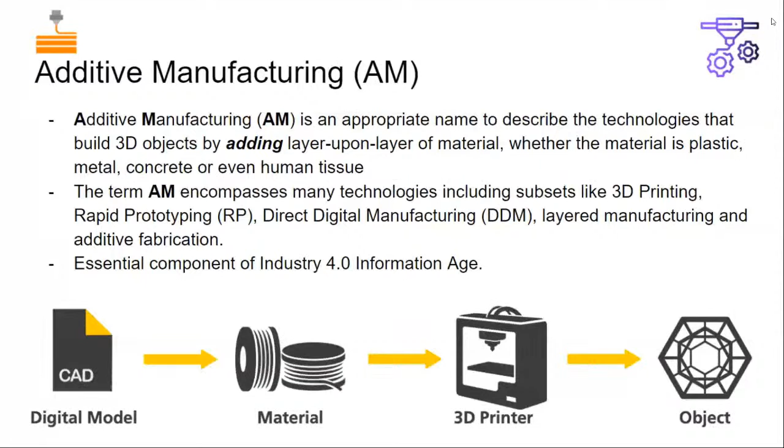Now prototype means the first product that is actually made for testing purposes, for modeling, testing, or showcasing. Now, if we create prototypes using the traditional method, it is highly costly and will take up a lot of time. So what we do is, most prototypes nowadays are made through additive manufacturing. That is why the term here is rapid prototyping.

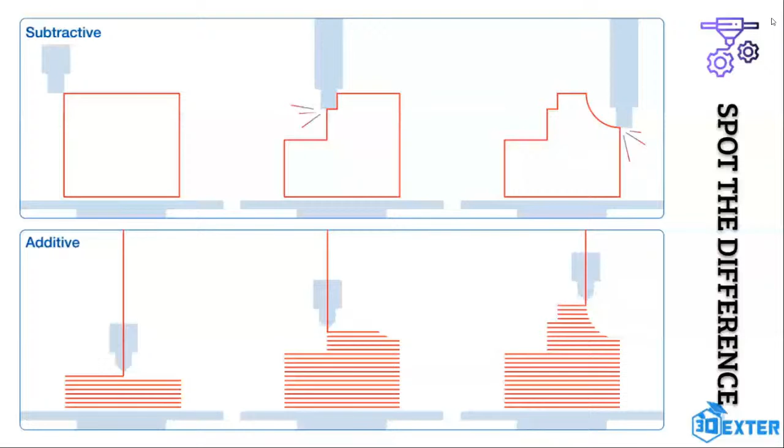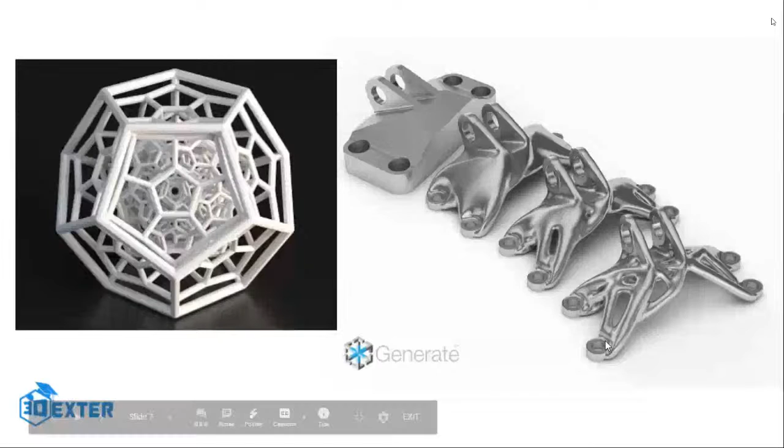Another huge advantage of 3D printing is, to the right, this process. You see, from the top you have an object, and you have reduced the mass of the object to such an extent that material is only available in the places where there is a high amount of stress. This complete process is known as topology optimization. Now the final object, as you see, the design has become a lot more complex, and it cannot be created using traditional methods.

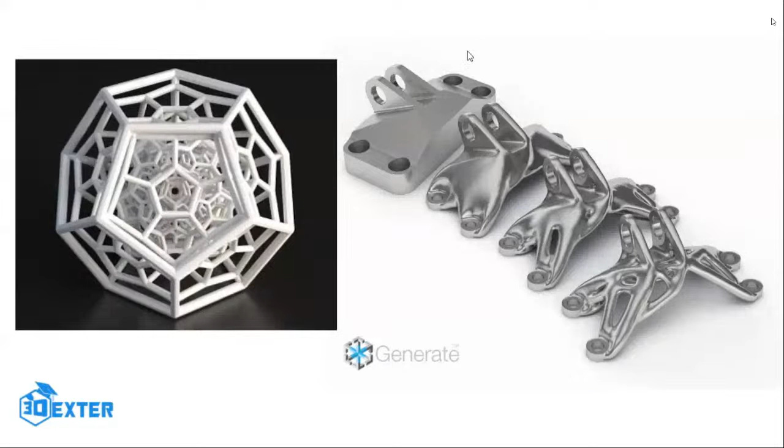For getting this kind of structures, very advanced, the term that is mostly used is biomimicry, resemblance to the human body or the structures in the human body. We can actually do that using 3D printing for such kind of structures.

Now let's move to the application areas in which sectors the 3D printing is being utilized. The first important thing is research and development. All research and development fields, in our country as well as foreign sectors, have utilized it to create as many prototypes as possible because it is highly cheap and the quality is better.

As I have just shown you, there was material reduction through topology optimization. So aerospace, automobile, those industries are trying to reduce the weight of their product. They have utilized it in the final product as well, not only to create prototypes but also to create the final product.

Now one of the sectors is biomedical, this is a sector in which the highest number of patents have been registered in 3D printing. There is a term called customization, and it has impacted so greatly that the medical industry has actually accepted the usage of 3D printing to a greater extent. Let's look at that.

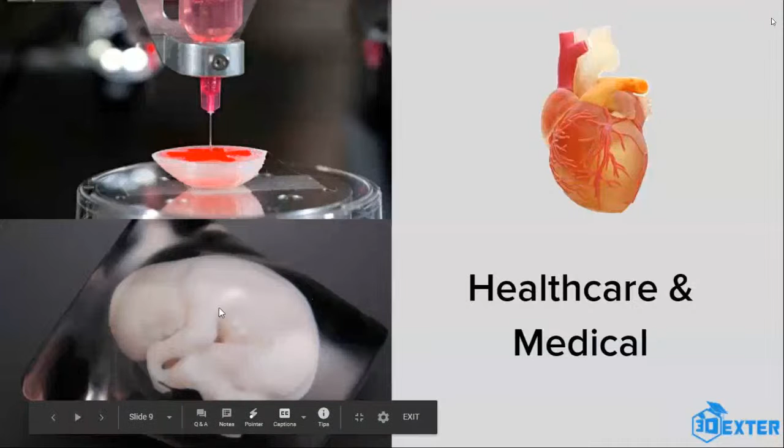In the same way, just below it, you can see a human fetus. In Japan, babies that are born still have defects during birth. So doctors try to 3D print the fetus so that they will be better ready with proper tools while operating on the child, so that there will be less blood loss and the child can easily survive.

Now, as I told you about mass customization, customization means every person's need is completely different. The shape and size required for each person is completely different.

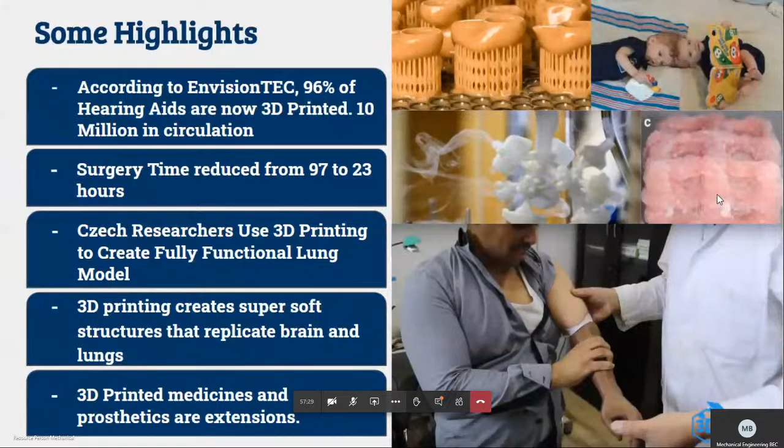Now the most important thing is prosthetics. Suppose a small child has met with an accident and lost his arm. Throughout the age he grows up, he will require a different set of prosthetic arms throughout his life. As long as he is growing, he has to change the prosthetic arm, and that can be done through 3D printing.

The biggest advantage here is cost effectiveness. The normal prosthetics actually available in the market are costly. 3D printing can create highly accurate prosthetics that are highly cheap as compared to the traditional method.

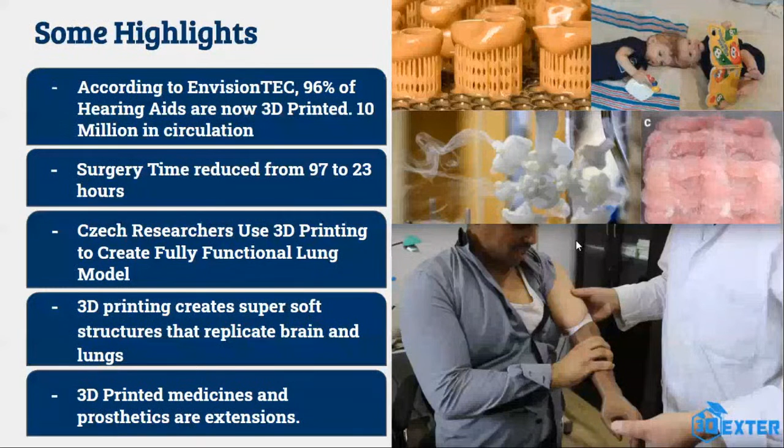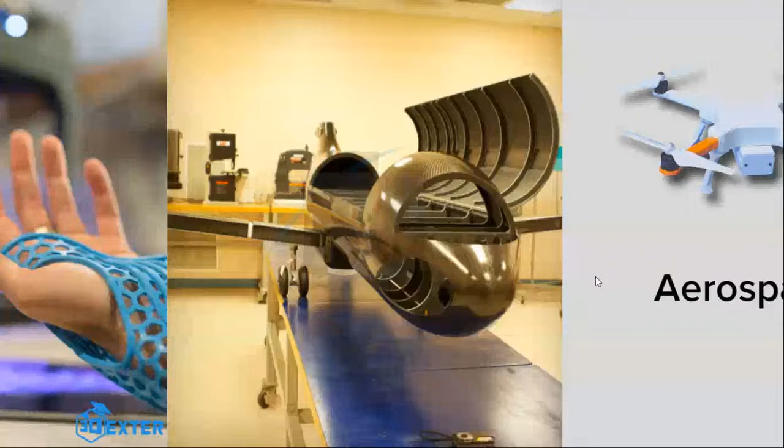Next is aerospace. A lot of advancements have been done in aerospace, creating plane structures and researching ways to reduce the weight of the plane to improve its performance.

Airbus now has a record number of 3D printed parts on the new A350 XWB aircraft, around 1000 parts. This isn't just a prototype, they're using 3D printed parts in their final product. NASA's rover currently contains over 70 FDM 3D printed parts. The advantage is that very complex designs can be created through 3D printing, which traditional manufacturing methods do not allow.

Now let me show you an example. This is a case study which shows a complete comparison between traditional manufacturing and a 3D printed rocket.

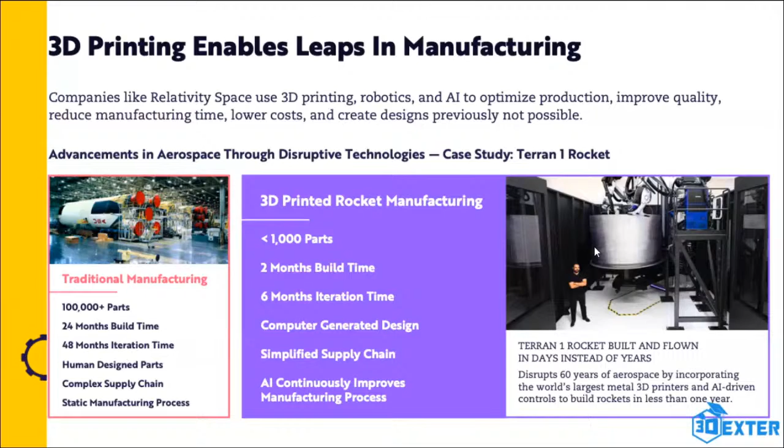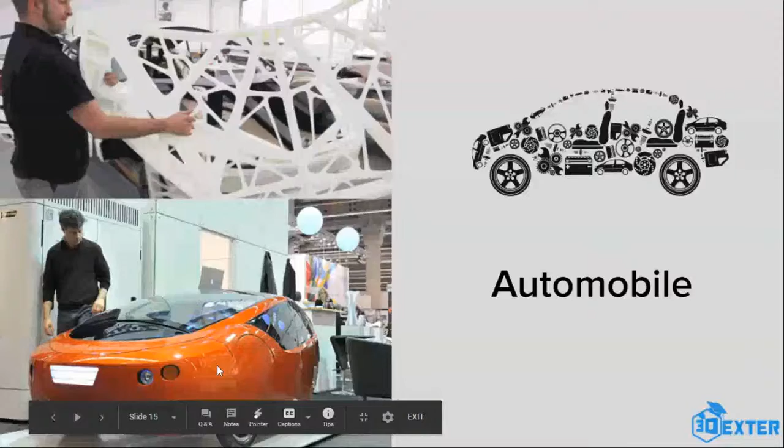A lot of parts of cars are being 3D printed nowadays to improve efficiency. For performance cars like Ferrari, they are trying to 3D print parts to reduce friction in the internal parts and reduce the weight of the car.

Next, going to education and research. The best thing about this is we can create prototypes very fast.

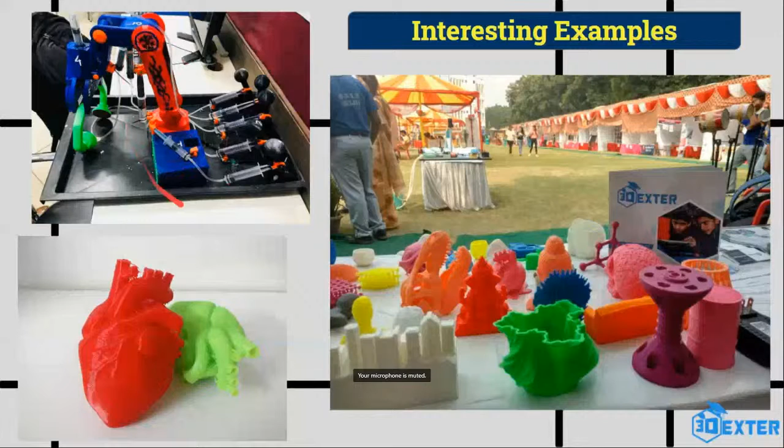3D printing is playing a huge role in education as well as the research industry, as you can create prototypes in a very fast manner. Now a huge advantage is mass customization, as the demand for individual needs is increasing.

Suppose you want a car designed exactly the way you want it, that is known as customization. The demand for customization is increasing, and that demand only favors 3D printing. It is completely different from mass production.

In mass production, we have a single design of a car and we create thousands of cars of the same design. Now we can create a thousand cars of different designs according to each customer's need. That is known as mass customization.

Moving into customizable products, the drone industry is rapidly evolving at present. They want lighter, faster and stronger materials. As the study of materials increases rapidly, designs are also changing rapidly, and these design changes can only be implemented through 3D printing.

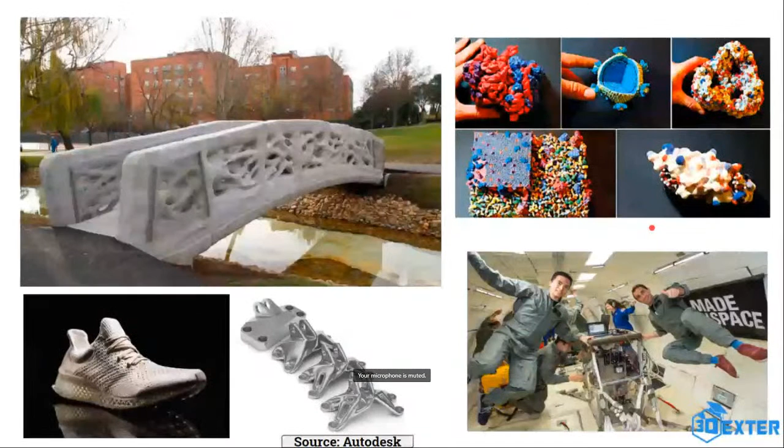In the architectural sector, scientists have used concrete to 3D print not only houses but also bridges. This is a bridge in Spain that has been completely 3D printed.

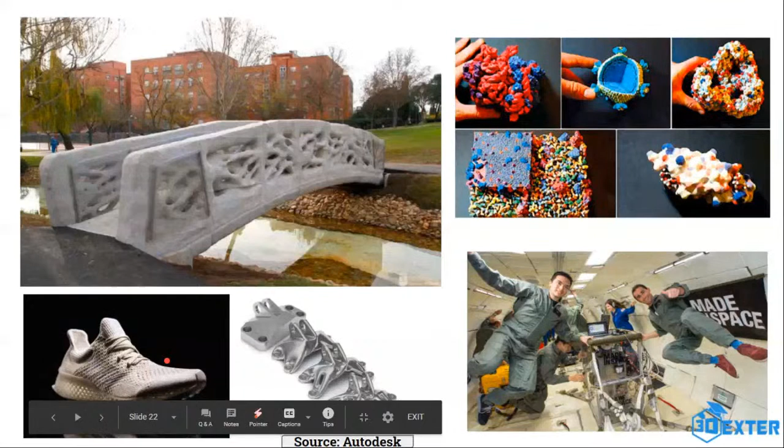Nike and Reebok have also started utilizing 3D printing to create customizable shoes. The word is customization, mass customization.

Now we have seen all the applications of 3D printing. Let me show you how it is actually done. Let me stop sharing this screen and share the screen of my software instead.

You can use any software for designing, it may be CATIA, SolidWorks, or any other software. First, you have to utilize the tools available to you. For example, in SolidWorks there is a wide variety of objects and tools that can be used for creating very complex designs. We are using SketchUp because for basic beginners it is very simple, and anyone can learn the basics of designing from this software.

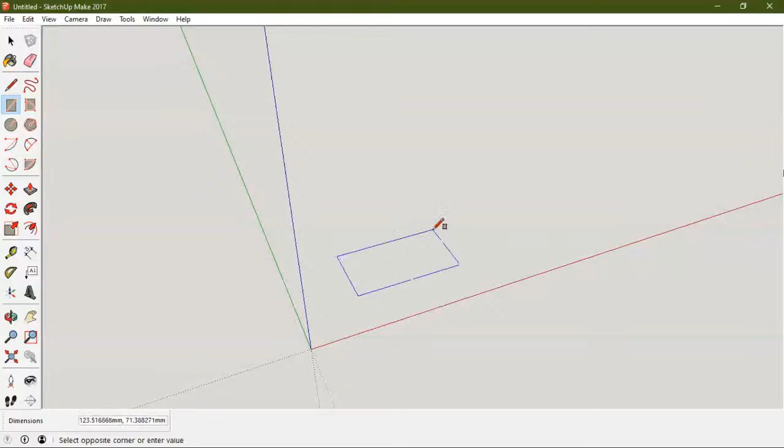We have tools that create 2D objects which we can then convert into 3D. Let me take the example of a rectangle. Now see what I will try to do, I have a pen tool and I will try to create something over here.

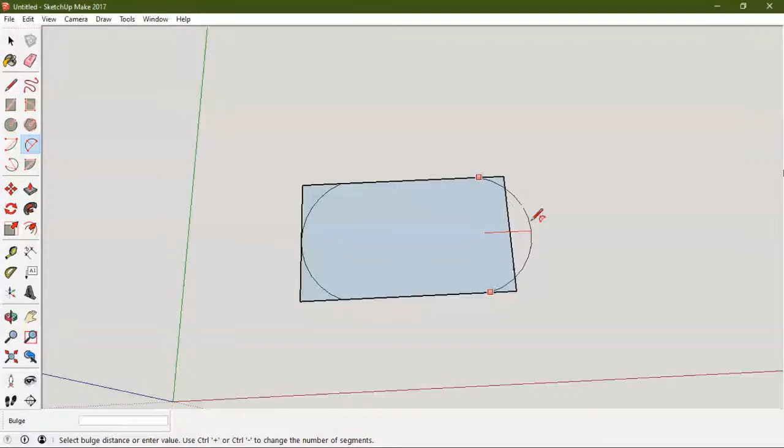Let me try to create a keychain over here. Not an issue, I will remove the excess part. Right now I am creating only the 2D image, and now I am using this push-pull tool.

These are all the 3D tools, so I can convert this 2D shape. Right now it is simply a single layer, like a simple paper. What I will do is push-pull it to make it three dimensional.

Alright, let me bring it to the center of the screen. Now, we have used the push-pull tool to increase or decrease the third dimension, that is the height. Alright, I have given something.

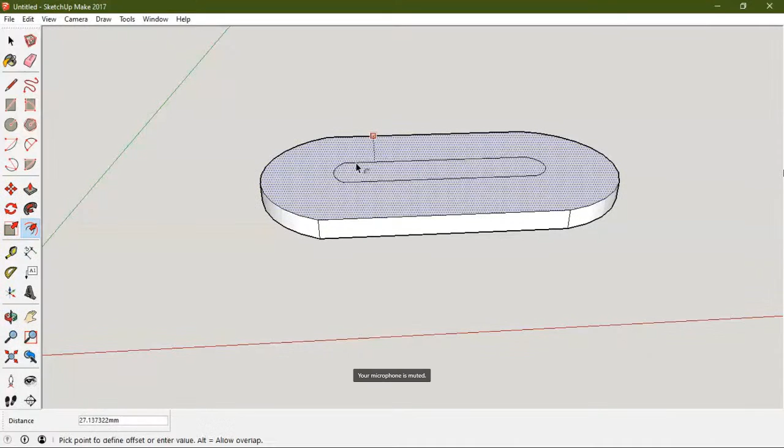Let me use another tool. This is an offset tool. Let me create another boundary inside. What I can actually do is take it down and write something over here. Okay, not my name, I will write the college name. So what we can actually do is design anything according to your requirement, right?

So you can use any software, as I told you. So this is the college name. Let's bring it to the center and reduce the size to make it appropriate. So I have done designing.

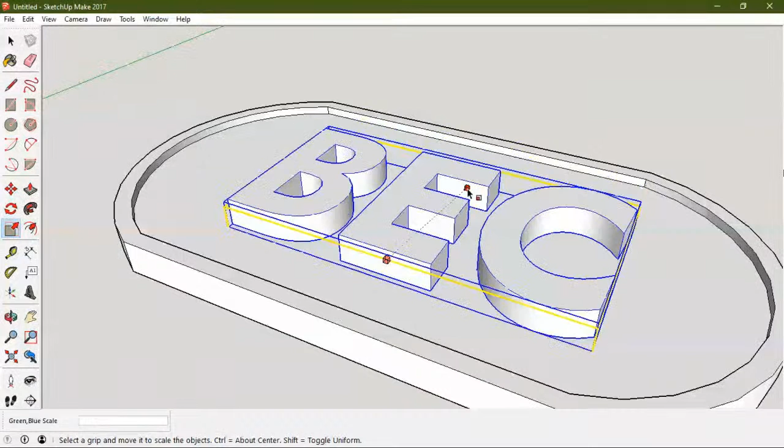Now, once my designing is completed, I will save this file. Remember, in 3D printing, whenever you save a file in Microsoft Word, you save it in doc or Word format. Now, while saving in any software like SolidWorks, they have a different format, and SketchUp has a different format. For 3D printing, whenever you save your file, you have to save it in .stl format.

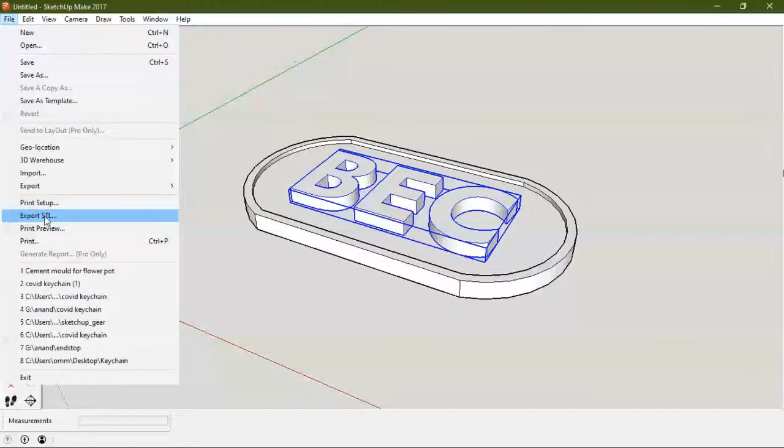I will go to File, then Export STL, and click on that. Once it is done, it will ask me where to save it. I will export it and save it somewhere, wherever is required. Let me save it in the desktop, BEC. Alright, so I have saved this in the desktop.

Now I will be opening another screen. So now my complete screen is visible. Now I will open the file. In the desktop you see this icon, it is in STL format. I will simply double click it because I have a software known as Cura installed on my computer. It's very interesting because all the settings required for 3D printing are done through this software, that is Cura.

The spelling is C-U-R-A, Cura. We have to wait a few seconds. This is the software, Ultimaker Cura. If you want to download it also, it is a very free software. The SketchUp software is also free.

You can use Google to search for SketchUp and Cura. Now, the advantage of SketchUp is, as I told you, it is very simple and anyone can learn it. The next is Cura, and in Cura the huge advantage is, with 3D printers being a bit different according to the hardware, Cura gives you the advantage that you can add your own machine.

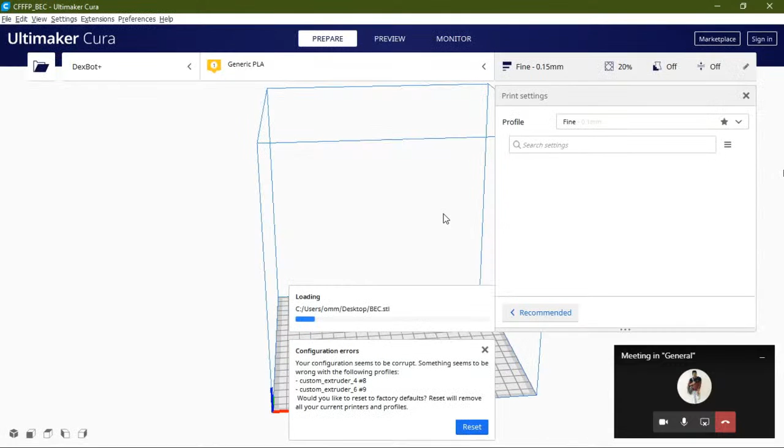Now if you go to Google and type Ultimaker Cura, Ultimaker is a 3D printing company and they have made an open source software. This is a free software, as I told you, you need not buy it. There are other softwares available which are paid versions, like for example Flashforge, a company.

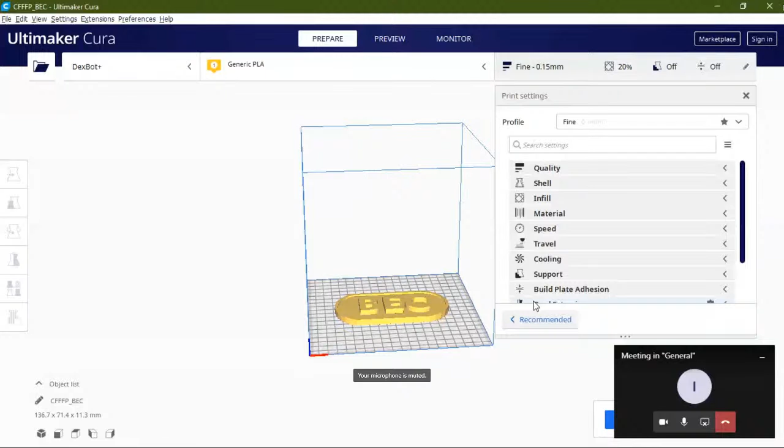Alright, now the software Cura is open. In the screen you are able to see a box over here, right? Now, as I told you, I can add my machine. You see, there are a lot of different varieties of machines.

Now the machine will be printer. I will go to manage printer. Whichever machine I want, I can select that. I can either add the machine or remove the machine. Suppose let's go to machine settings.

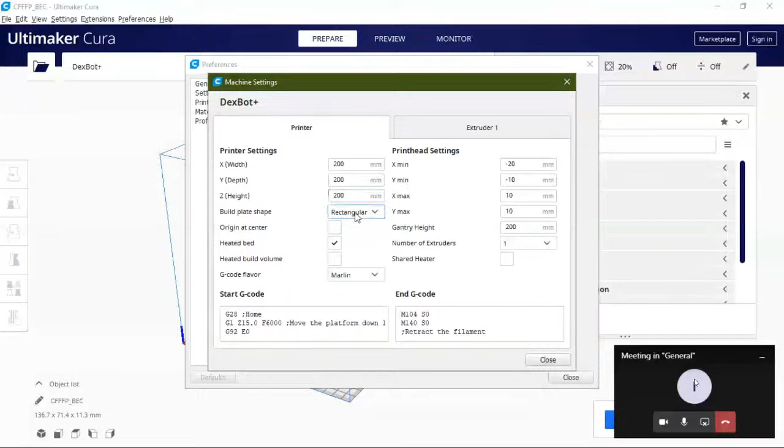All the hardware requirements of the machine are done here, like the x-axis, y-axis and z-axis. So basically the hardware data of the printer, we are entering it over here, the bed plate, all the size of the bed plate, whether it has a heated bed plate. So all the options we are providing here.

Also the nozzle, there is a nozzle, I will show you that also. So basically now the data like the filament size, the nozzle size. Nozzle means the part from where the material comes out. All these are available. I will select according to my needs. If I am attaching a 0.4 nozzle, I have to enter that. If I am changing my nozzle, for example using 0.6 size nozzle, I have to enter that. So this is the advantage, I can use any 3D printer that is available in the market.

Now see, this is my object, we have designed it in a CAD file. Now I'm going to tell you some of the custom things that we actually do, what are the factors that we influence here. We have got a lot of settings, so I will give you a quick overview about all of them. Before that, let me slice it so you can get a timing over there.

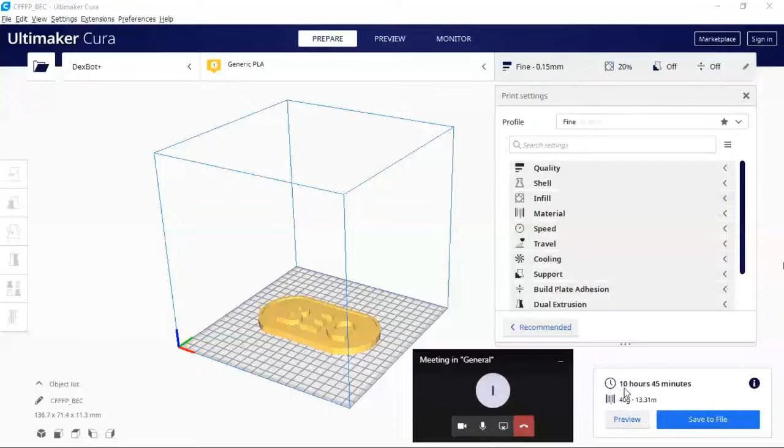Now see, in the bottom right corner you can see 10 hours and 45 minutes. So this object will be 3D printed in 10 hours and 45 minutes. It is a very small object and it is taking a lot of time, 40 grams will be used, 10 hours 45 minutes. Now why is it so?

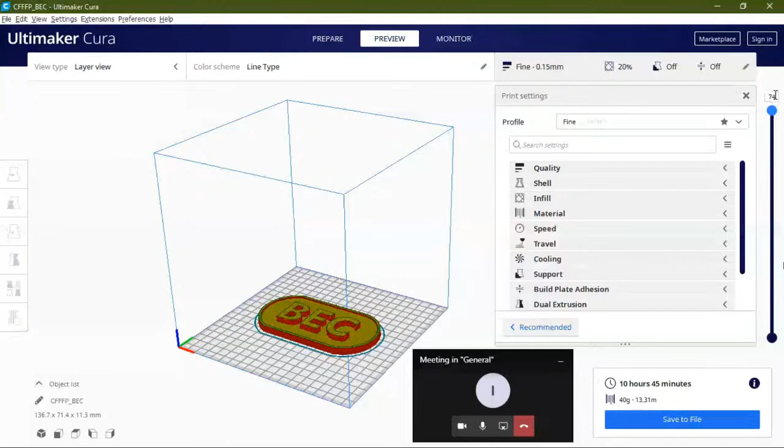Let me go to the preview option. Now see, it is written BEC. As I told you, additive manufacturing means printing layer by layer. In this software you can see the individual layers that are actually 3D printed. To the right hand side there is a bar or slider, and here you can see there are 74 layers. Let me zoom in again, you can observe all the individual layers, how they will be 3D printed.

So we can set all the parameters over here. You can see the first layer, it is completely yellow, meaning it is completely filled. As you go up, you can observe it is almost hollow inside. We are using grid-like structure to fill up. Let me check what is the infill, it is 20%. So the object I have kept 20% infill and 80% is hollow.

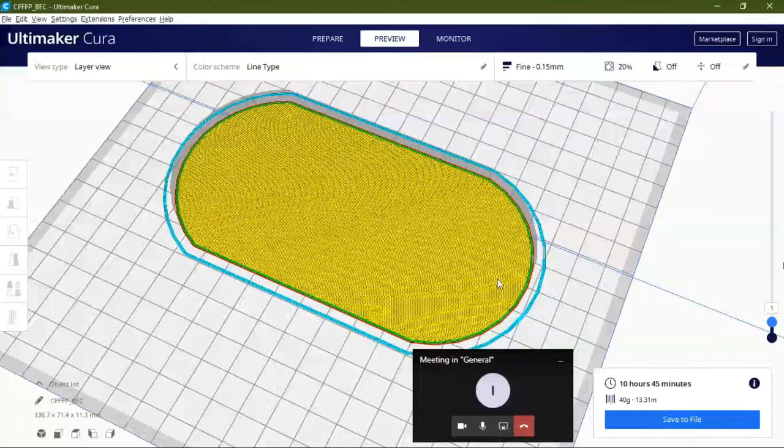So this is what I can do in 3D printing. I can make an object look completely filled from the outside, and from the inside I can keep it completely hollow. Now see this BEC, inside it is a grid-like structure, and as you go up the top surface will be covered up. From layer number 65, 66, so from 67 onwards the top layers are covered up. This is how 3D printing is done, layer by layer.

Now what are the factors we are changing here? There are 74 layers. The first option is quality. The quality depends upon the number of layers. How to increase or decrease the number of layers? We are giving the layer height. If you are using a 0.4 nozzle, the minimum layer height means more number of layers, so the quality will be good.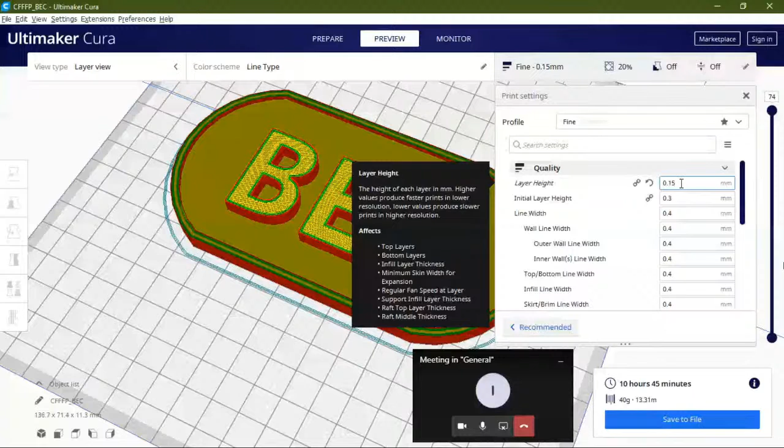Now there are two things: if you want better quality, the time of printing will be high. You see 0.15, it is very good quality and it is taking 10 hours 45 minutes. Let me reduce the quality, I will go to 0.3, so each layer height will be 0.3, thicker layers. See the number of layers has reduced to 37, and it is taking 5 hours.

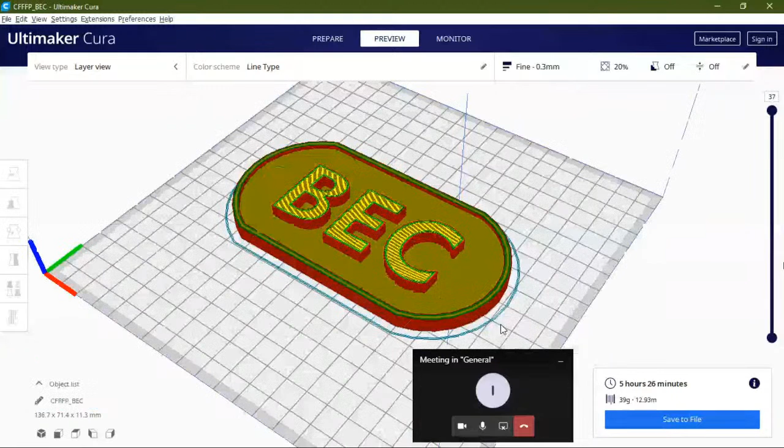Next is shell. So what is shell? There are two things, shell and infill. Let's go to one layer to explain that. Now in this, one is infill. Basically inside a 3D printed part, let me close it. Inside the part is completely hollow or the setting is different, so the inside part is known as infill and the surrounding outer part is known as shell. Just like a shell of a tortoise, in the same way we have a shell over here. You can see the green and red part, that is the shell. We can give the data about the thickness of this part, the shell thickness, and also the infill we can decide over here in the software.

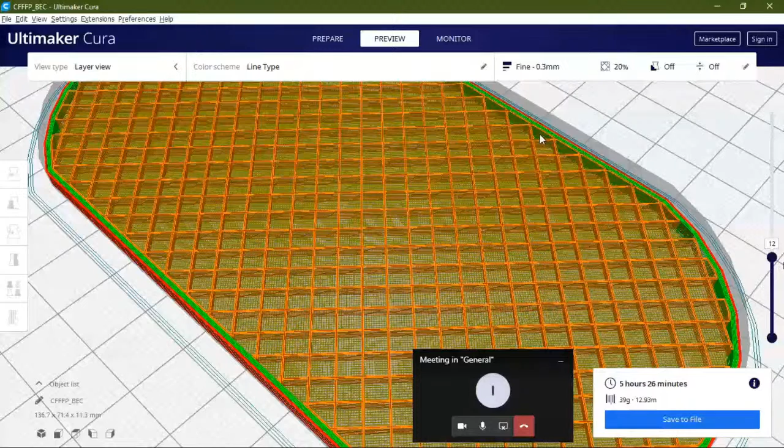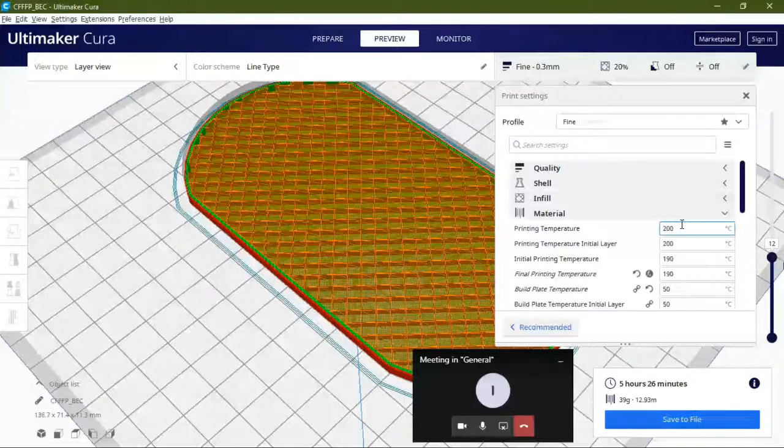Now this cannot be done in casting or any other process. It can be done over here through the melting temperature of the material. All of this data, because the technology I am going to show you is FDM based technology, so what happens is we are melting a thermoplastic. We are setting the melting temperature of the plastic, and it will be followed like the speed, travel, and all. These are being provided in this Cura software.

Now once my software has created all this, once it is done, I have given the required parameters and my required setting is done. What I will do is save my file. Now it is a huge file. Let me reduce the size also. See, it is very small now. Let me slice this.

1 hour and 10 minutes. It is taking 8 grams only. Let's see the preview. This is the preview. There are a total of 18 layers. It is taking almost 1 hour and 10 minutes.

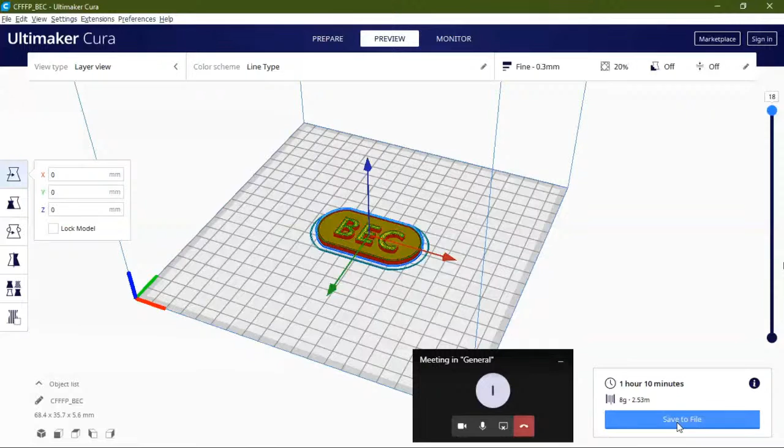Now the next thing, you have to save the file. I am saving it in the desktop again. Okay, C triple FP BEC. Done. Now I'm minimizing the screen. Okay, this is the file. This is the file that I will need to transfer to the printer for printing. This is the file, C triple FP BEC.

Let me open it in notepad to see what are the commands actually in this file. I'm right clicking to open it in notepad. Okay, it is taking some time, let's wait for a few seconds, it will open up, not an issue. Alright, it's opened, now I will open it with the notepad. Let's see what's happening over here.

Now, if you see in a CNC machine we have G codes, in the same way this is also a G code for our 3D printer. Exactly like a CNC machine, we have the similar G code for this also. You see the motion of the print head, they are all described over here. G, X, Y, Z, everything, the motion, all this data is actually available over here, so we can know the motion from here. We give this in the G code. So Cura created this G code for us: the motion, at what time the printhead should be at what location, the temperature, what should be the temperature, what should be the bed plate temperature. So all this thing is given over here, like the G code is given from where to start. All this data is actually available over here.

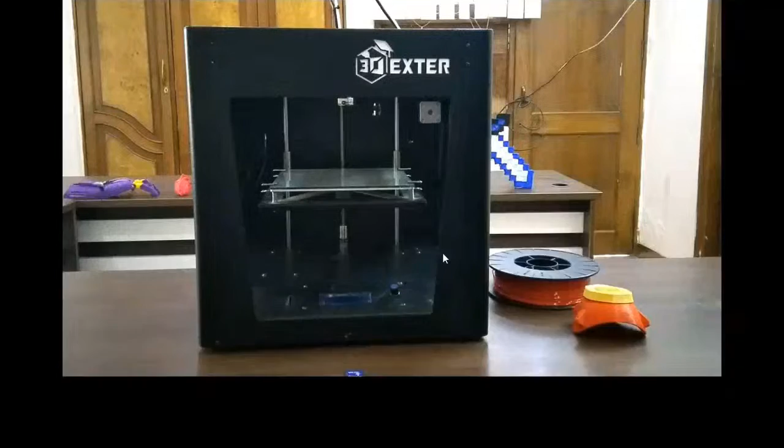Now, on the screen, you are able to see a 3D printer. This is an FDM based 3D printer that I am going to show you. I will be telling you how to operate this 3D printer. Let's start it. I will show how to prepare the 3D printer as well as how to give a print command. Now, what I have done, I have created a G-code.

So I am turning on the printer. As soon as I turn on the printer, the electricity will flow. The LCD screen will turn on. We have an LCD screen that will be turned on. This part is known as the print head.

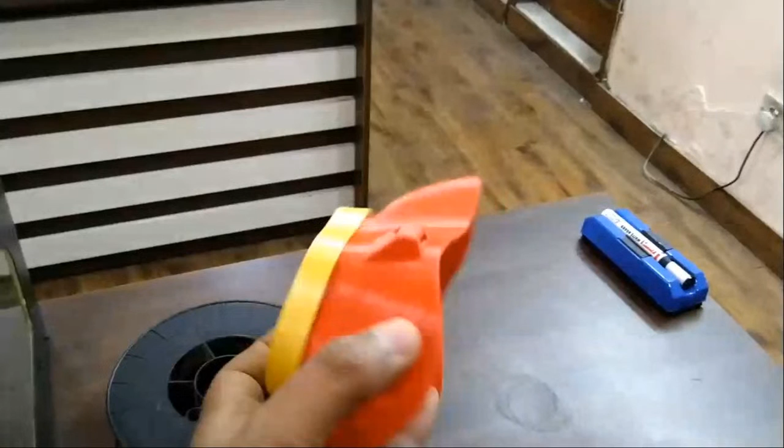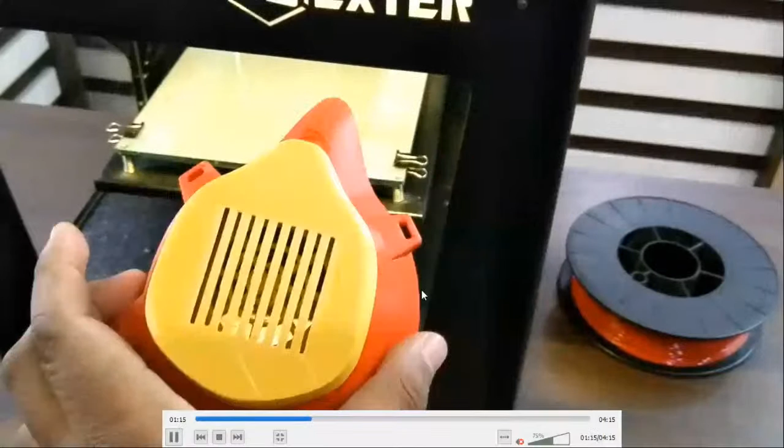Let me first show you a 3D printed part. As I told you, 3D printing is done layer by layer. If you observe this part, you can actually see the layers. So this is what I was saying — if you increase the quality, the layers will be less visible, and if you decrease the quality, the layers will be more widely visible. You can see the individual layers here. This is a 3D printed mask.

Now moving to the LCD screen, there is some data there, like it is showing 28 right now. Since I just turned on the printer, it is showing the room temperature. We have to heat it up, so I will have to prepare my printer. I will do it through this knob — I give the commands and control it through this knob.

If I click it, I will get options. I can rotate it clockwise and anti-clockwise. So this is the knob that we have. This complete part you are seeing right now on the screen is the print head. In Cura, we had given the setting for nozzle diameter — so this is the nozzle, from which the melted filament will come out. This is the hot end part, from where the melted filament will come out.

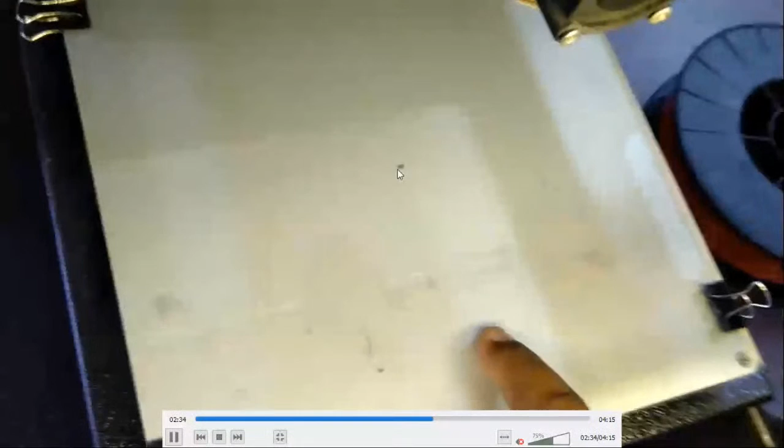So next is the heated bed plate — this is the part where the printing will actually take place. On this bed plate, the printing will actually happen. That is our raw material. As I told you, this technology is known as FDM based 3D printing. This raw material is thermoplastic — it is PLA, polylactic acid.

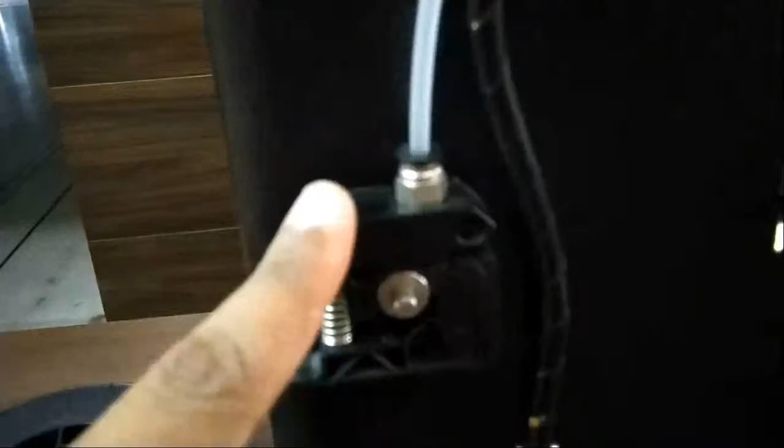It melts at 200 degrees Celsius, so the nozzle should be at 200 degrees Celsius before printing. This is the extruder part — it will push the filament from the back side. I will place the filament spool over here. It will push the filament into the guide pipe, and this guide pipe goes inside the print head. This guide pipe is white in color.

So through this guide pipe the filament will come, and it should come out from the nozzle. This is the basic principle. From the back side we are pushing the filament, and at the front I have a heated nozzle, and the material should come out. That is our LCD screen,

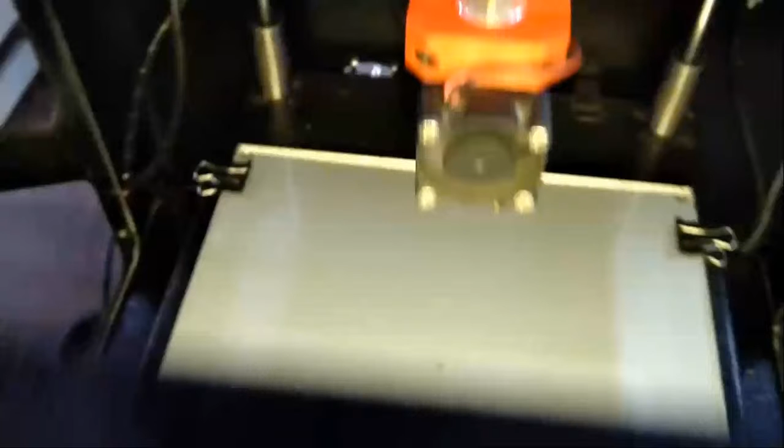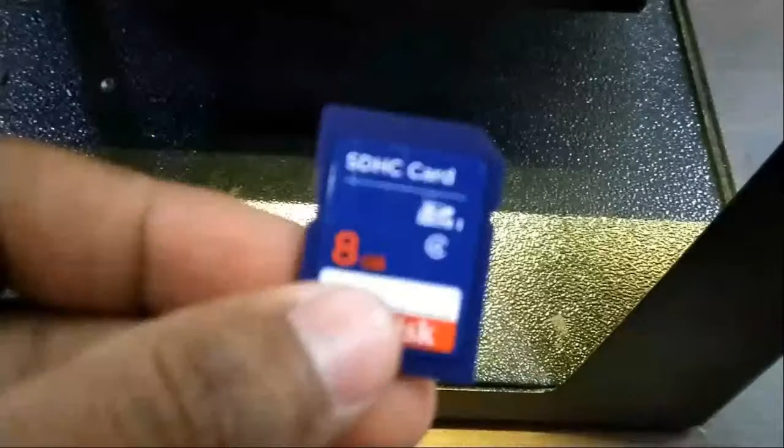and the knob to control it. I have this filament, and the most important part is the SD card. Now I had created a G-code, so basically what I did was I copied the file to the SD card. So whatever file we need to print, we have to copy it into the SD card, and I will be inserting it into the designated slot over there. Okay, right now these are the parts that I told you about.

Next I will be showing you how to prepare our printer. Imagine that I have to insert the filament. So how to do that? Actually, first thing is the nozzle should be at the melting temperature of the raw material. So the print head is over here, and just below it there is an aluminum block.

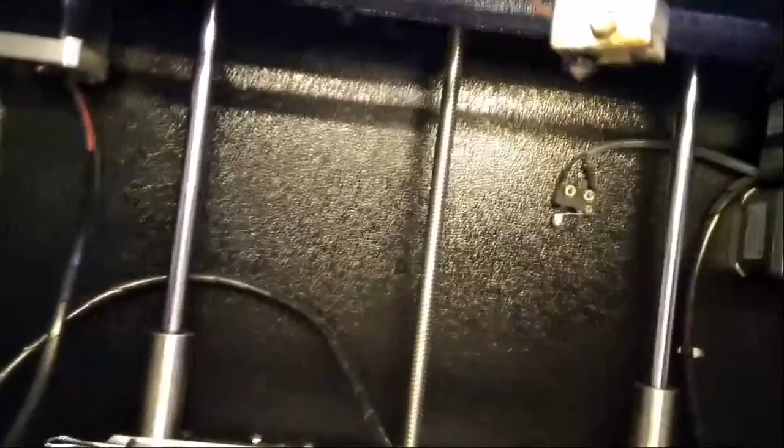Let's have a close-up view. This is an aluminum block. There is a cartridge for heating it, and below it I have a nozzle. This is the nozzle part. So I have to heat this block so that the melting of the thermoplastic will take place and the filament can come out. Alright, you can see the screen over here.

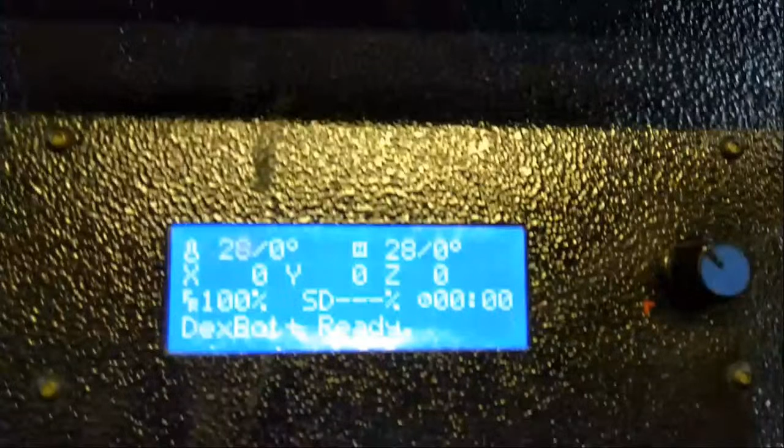It is at room temperature, 28. There is no target temperature. Okay, there is two temperatures: one is for the nozzle, one is for the heated bed plate.

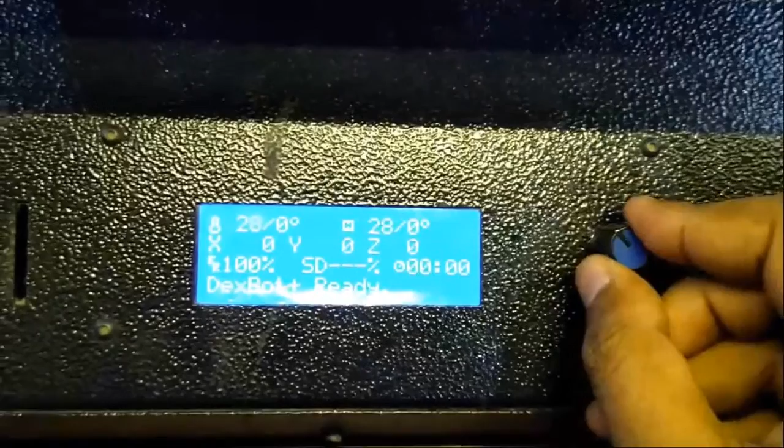Let me show you how to do that. I will click on the knob. By clicking on the knob, I will get more options like prepare, control, SD card. So I will go to prepare. How am I going there? I am rotating the knob, and the cursor is going up and down. I will click on prepare. I will get more options.

Now the raw material that I am using is PLA, so I have to select preheat PLA. I will select preheat PLA, let's click on that. Now there are options over here. I can heat only the nozzle, I can heat only the bed, but I will heat both. So I will click on preheat PLA.

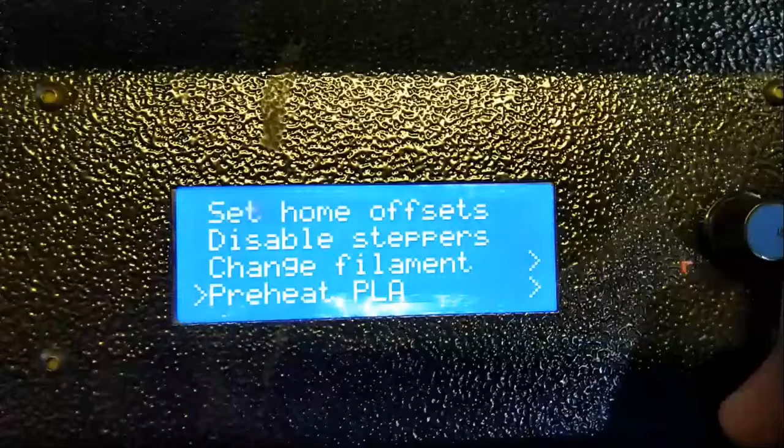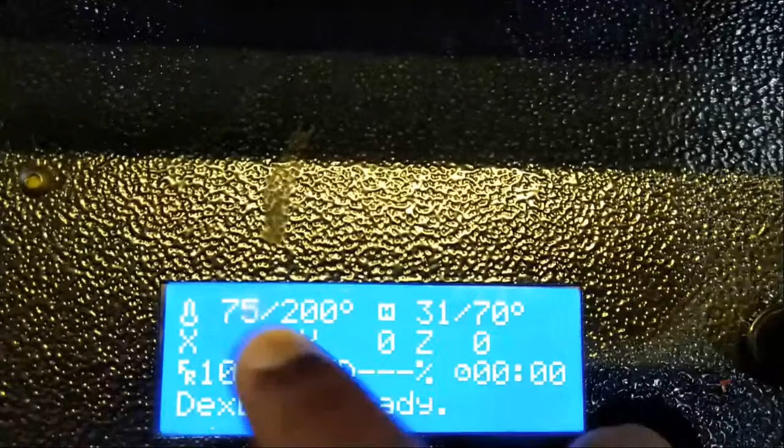Alright, now see, the nozzle and the bed, both of them have got a target temperature. Like the nozzle has got 200 degrees as the target temperature, and the bed plate has 70 degrees as the target temperature. So these are all given through this screen. We are getting the reading of the data in the LCD screen.

Okay, now in the meanwhile I will insert the filament manually from the back side. That is the extruder part. How the extruder works is, there is a gear and pulley arrangement. This is a gear and there is a pulley arrangement. So I will place the spool in the spool holder.

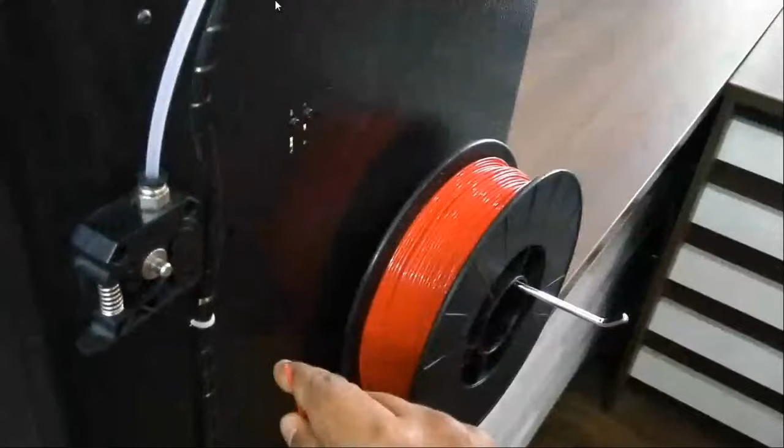This will facilitate the rotation of the spool and the filament can come out easily. I will insert the filament into the extruder. Now one more thing is, there is a very tight connection, or there is a very small amount of gap between the gear and the pulley. So I will be pressing a lever. There is a lever, so by pressing that, it will create a gap. See, by pressing that I am creating a gap.

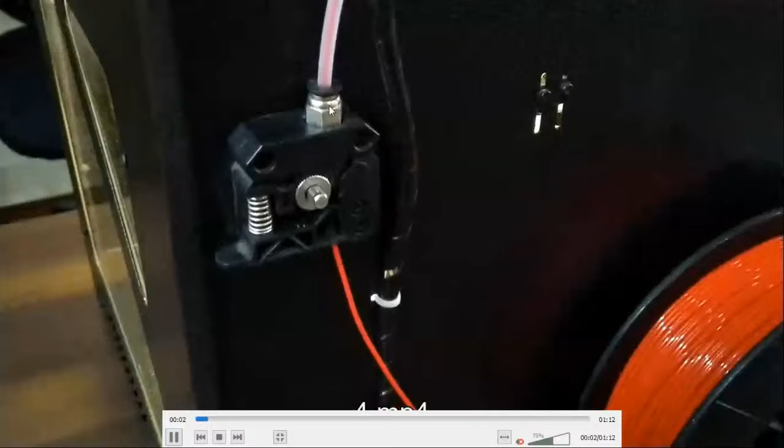Alright, and through this gap I can insert my filament. You can see the white pipe, I have already inserted the filament. Now after inserting the filament, it is inside this guide pipe. It is mostly translucent, so you can see the red filament inside this translucent pipe. I will be manually pushing it from the back side. You can see the wire traveling, that is my wire, and it will get inserted into the print head.

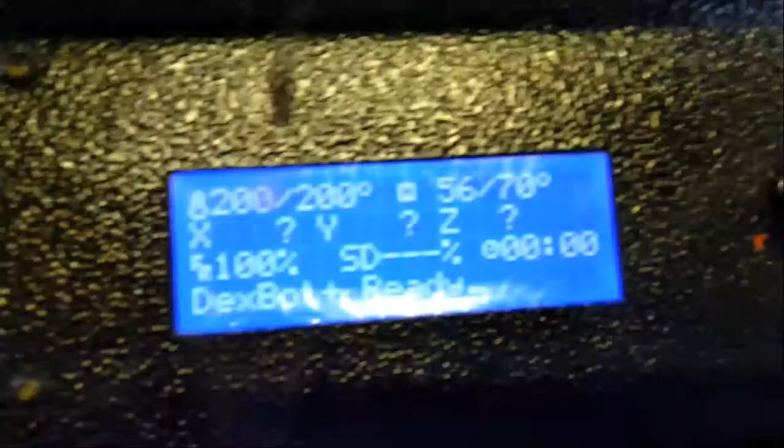Alright, so basically this guide pipe is giving a direction for the filament. I will check the temperature, it should be at 200 degrees Celsius. The temperature for the nozzle is 200 degrees Celsius. Now I will push it a little bit more, and the material will be coming out from the nozzle. Alright, so it is ready.

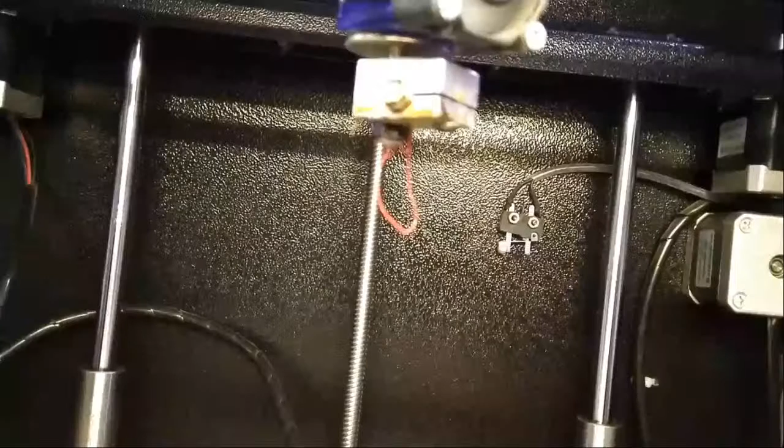My printer is ready to be given a print command. I have prepared my printer now. Everything is ready, so I can simply give a print command right now. So these are the procedures to actually prepare a printer, an FDM based 3D printer.

I have prepared my printer. Next, what I will do, I will insert the SD card now. As I told you, I have already copied a G-code. It is a small cube that I am going to show you. Let me click on there. Okay, done, I've got 'card inserted' on the display.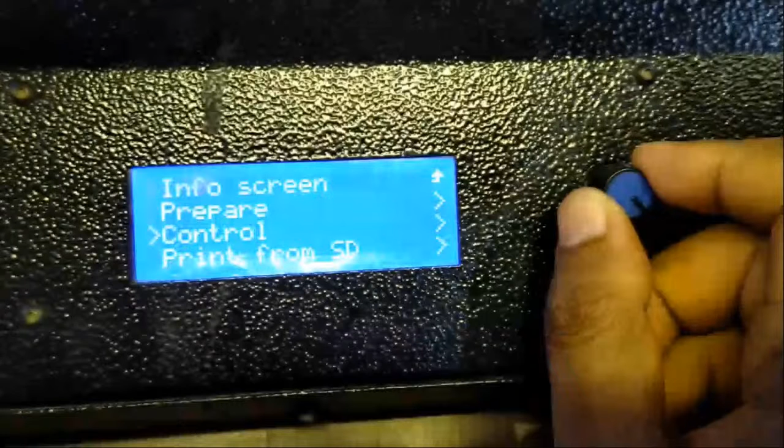I will click it over here. Now see, I have got an option 'print from SD card'. I will click it over there. I will go to the G-code, the 20 cross 20 cross 20 cube.

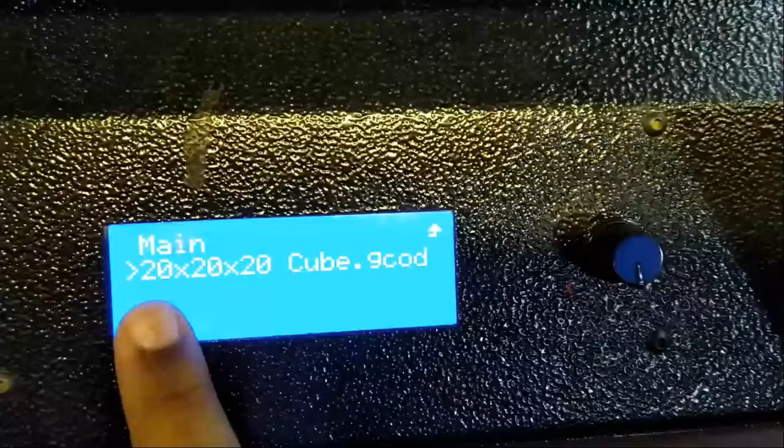Okay, so this G code we can 3D print now. I will simply click it over here. Now see, there are a few things that is going to happen. The print head will come to a home position. How does the printer know what is the home position? There are limit switches that are actually attached.

Now you can see the Z axis, the bed plate is going up. There is a switch in the back. Once this switch is pressed, it will stop it over there. So the X axis, Y axis and Z axis motion is done in the 3D printer.

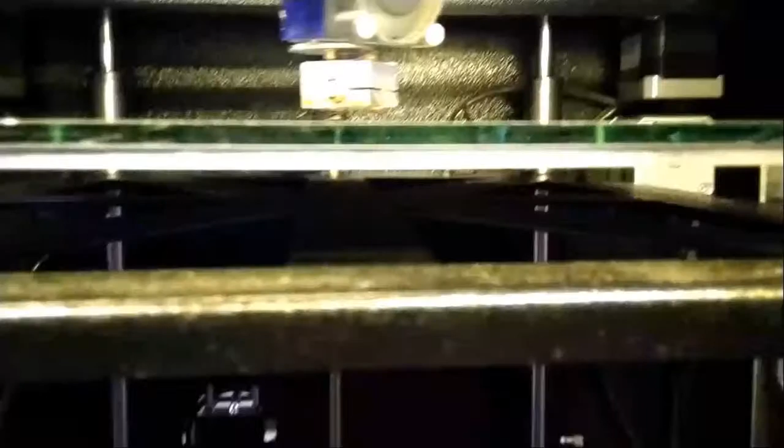The small amount of material is coming out. We let it go. Now the printing has started. So wherever we have kept the model in the Cura software, it will go there and start printing. You see, from the back side the filament has been pushed and the material is being deposited.

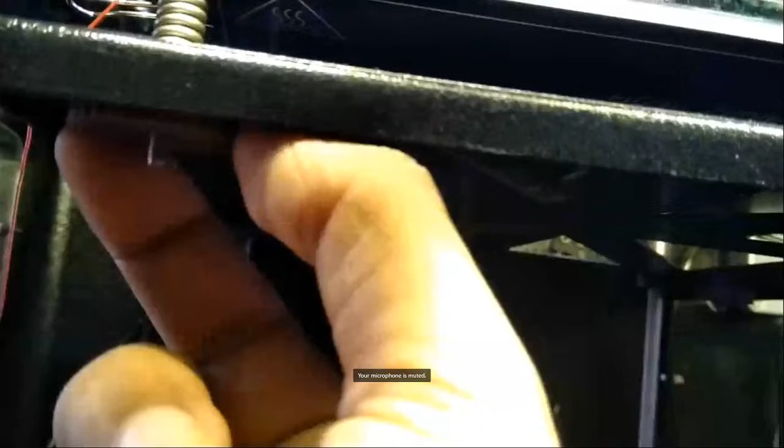Now another thing I have to ensure is the first layer and the second layer should both actually stick with the bed plate properly. There should be very proper sticking of the bed plate. To ensure that, we have calibration knobs. At each corner of the bed plate there is a calibration knob, so I can rotate it according to my requirement. I can increase it or decrease it according to my requirement.

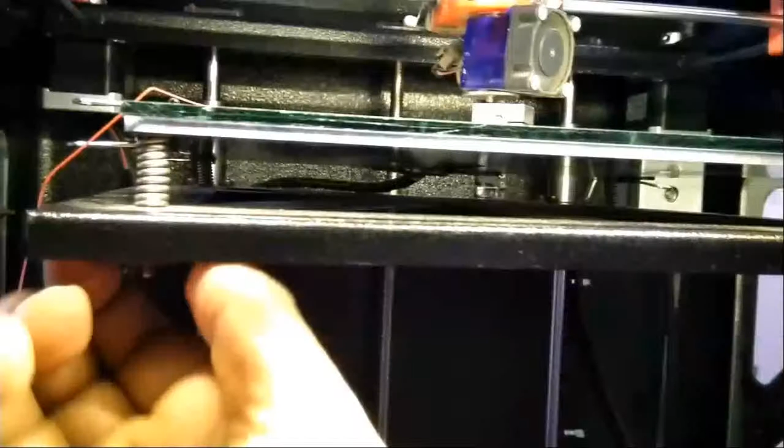So as you see, it has started printing the second layer. Now I can rotate it. So basically it is upon experience. Also, this calibration has to be done for every print, for the first layer only. We are calibrating it for the first layer always. I can increase or decrease the distance between the nozzle and the bed plate, so that my material can properly stick to the bed plate.

See, the material is coming out from the nozzle just like a glue gun, a hot glue gun. It is working on the same principle. So basically, as soon as the material is coming out, we are giving motion to our print head. It will move according to the G code that we have created and the material will be deposited.

Alright, so by fast forwarding, you see this cube has been 3D printed and many layers have already been put into place. Now observe this thing.

The x-axis and y-axis motion is done through the print head, and there are belts attached. You can see the belts are attached to the print head. So basically these belts are controlling the motion, and these belts are attached to the stepper motors.

The z-axis motion, like after each layer has been 3D printed, the bed plate will come down by one layer height. So how does the bed plate come down? We have an arrangement, a threaded rod arrangement in the back. I will show you right now. So due to that threaded rod, by each rotation the bed plate comes down a little bit by one layer height and another layer is deposited. This procedure goes on and our final product is created. You can see and observe that.

Alright, so now let's see some data that is actually displayed on the screen. Once we have given a print command, we will get the name of the print. Now feed rate is 100%, I have not changed that data. When I turned on the printer, it was showing question mark X, Y, and Z. Now it is showing some data like where the print head is located.

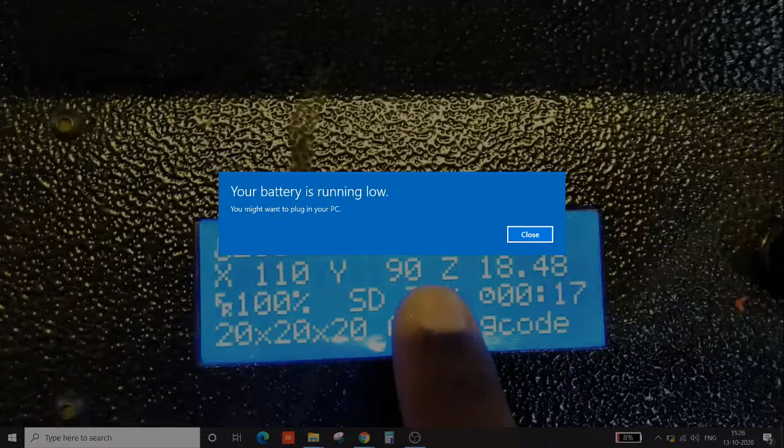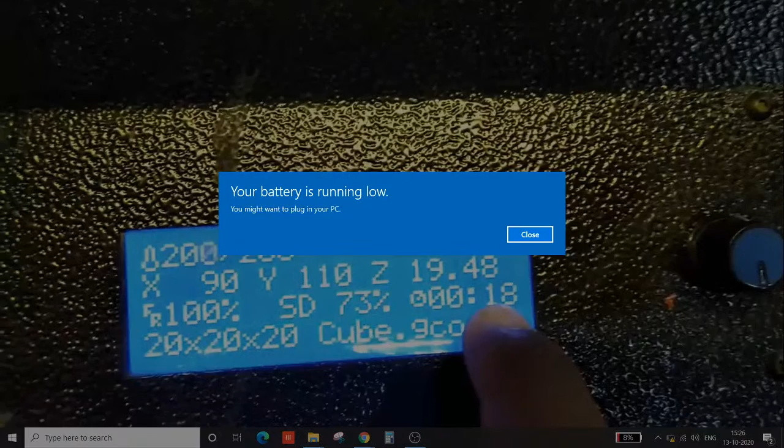Now SD 72% means 72% of our file has been completed. It is not showing the remaining time, it is showing how much percent is completed. Now it is showing 73%. Next is the timer: how much time has passed since I gave the print command. So 18 minutes have passed since I already gave the print command.

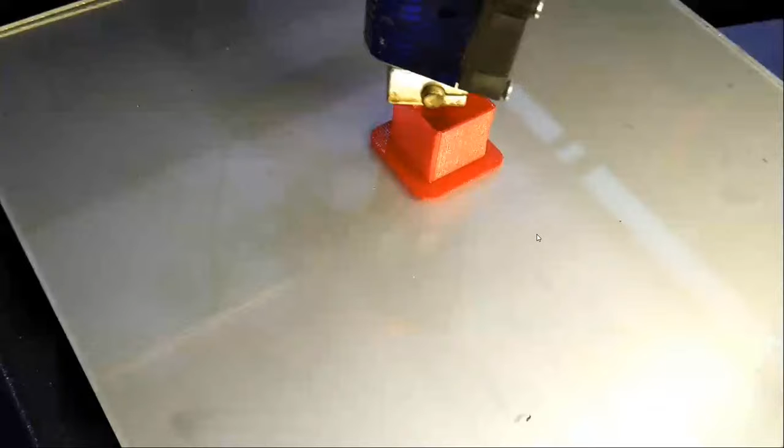So basically all this data is actually available on the print screen. This is how the FDM based 3D printer actually works. This printing will go on and on till the final layer is created. This is how our printer actually works.